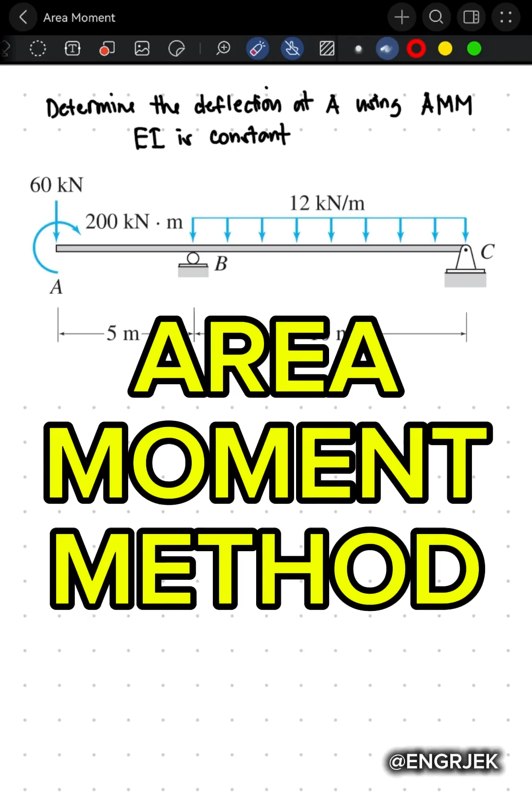So for this problem, we will determine the deflection at A using area moment method. So as you can see sa problem, this is similar sa problem natin last time. Magkaiba lang this time yung method na gagamitin natin in solving the deflection at A. Now, before we use the area moment method, dapat mapredict muna natin yung behavior ng beam natin. And we will use shear and moment diagrams.

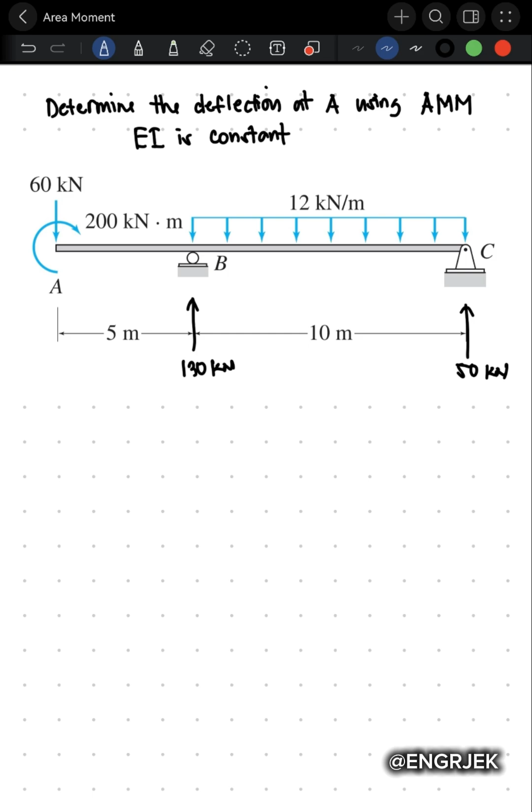So by using shear and moment diagrams class, as you can see, after determining the moment diagram, we can predict now the elastic curve of the beam. Kasi meron tayong rule class sa structural theory, if we have a positive moment, ang elastic curve at that point projected from the beam is concave upward. But if we have a negative moment just like this, we have a concave naman downward for the elastic curve.

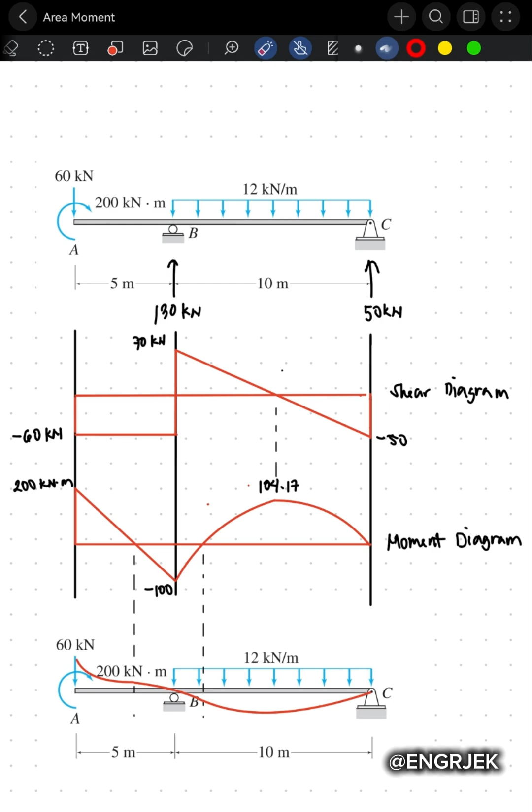For this diagram naman, which is positive moment, we have a concave upward. So overall, this is the elastic curve for the beam. As you can see, meron tayong concave upward and concave downward. Now, very important ito class, pag-determine natin ng mga tangent lines if we can draw the elastic curve. So balikan lang natin, nakakuha yan by determining first the moment diagram.

So after determining the elastic curve class, we can now draw the tangent lines. So as you can see, if I draw a tangent line at B, ito yun. And we can say that this is the tangent or deviation of C from tangent B. Kaya ang tawag natin is ganyan designation. So after determining class the elastic curve of the beam, if this is the new position of A, from B, ang tawag dyan natin, this distance is the deviation of A from tangent B. Kaya yan yung designation natin.

And yung deflection natin is from here, the new position, and from the initial position, and that is deflection at A. So ano ba mga meaning nito class na tangent of C or deviation of C from tangent B, and ano ba yung meaning ng deviation of A from tangent B?

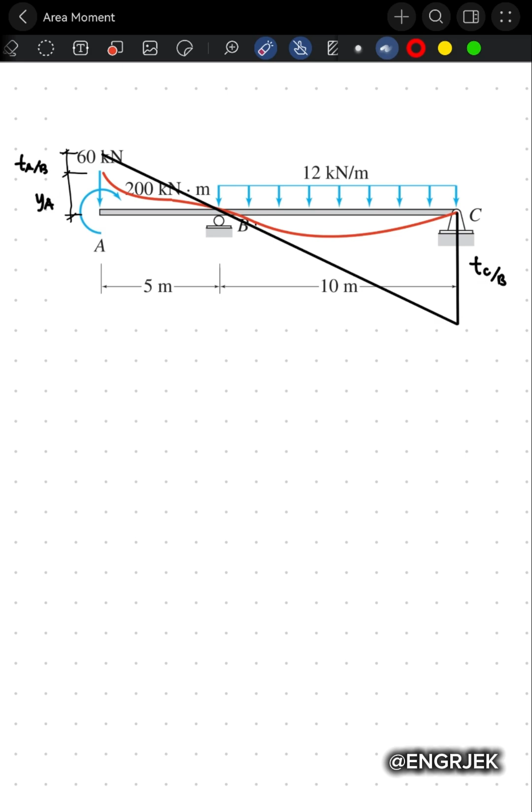So yung meaning class ng deviation of C from tangent B, that is the moment of the area under the M over EI diagram between points B and C about point C. So yung shortcut lang yan class is kung ano yung unang letter, dun tayo magmo-moment. Same case at the deviation of A from B, this is also the moment of the area under the M over EI diagram between points A and B about point A.

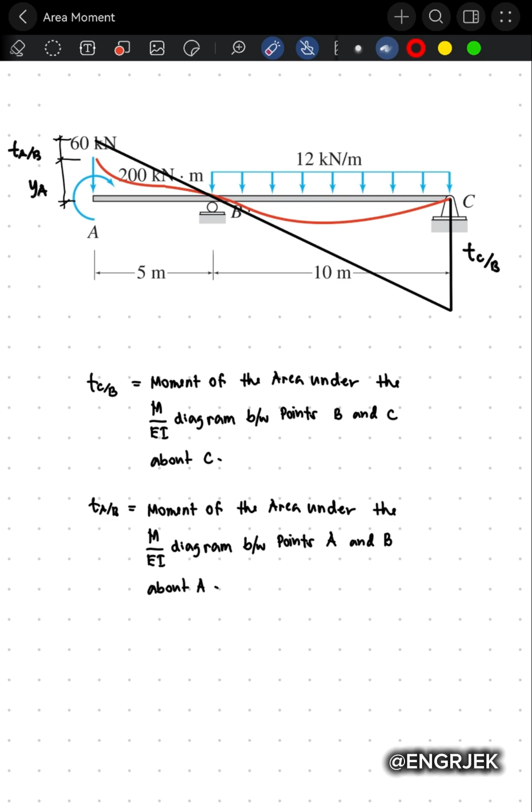So for this problem guys, this is the M over EI diagram using cantilever method. So paano ba yun nakuha? So I assume, let's say this is the fixed support at this beam. So lahat ng forces and loadings natin, moment tayo at that point. So if this is the fixed support, moment about that point, since we have 200 kilonewton meter, that is considered rectangular. So as you can see in drawing ko dito, that is 200 over EI, and that is the M over EI diagram for moment na 200 kilonewton meter.

Next, we have 60 kilonewton force which is going downward. If mag-moment tayo sa fixed support at C, we have a negative 60, the force, multiplied by moment arm which is 15, kasi yung distance niya from C is 15, we get negative 900 over EI. So for our concentrated load class, that is a triangular M over EI diagram. Next, we have a 130 kilonewton force, and mag-moment tayo about point C. And that is 130 multiplied by 10, positive. We have now a value here, 1,300 over EI. And that is also a rectangular M over EI diagram.

Next, we have a 12 kilonewton per meter. So yung moment diagram niya is ganito. We have a negative 12 multiplied by 10, that is the force, multiplied by moment arm, multiplied by 5. We have a negative 600 over EI. So this is your M over EI diagram using cantilever method.

Tatandaan dito class, if we have a concentrated load, we have a moment diagram na first degree. So kaya yung 60 kilonewton, we have a triangular, and for 130 kilonewton, we have a first degree then, which is magka-create ng moment M over EI, which is 1,300 over EI.

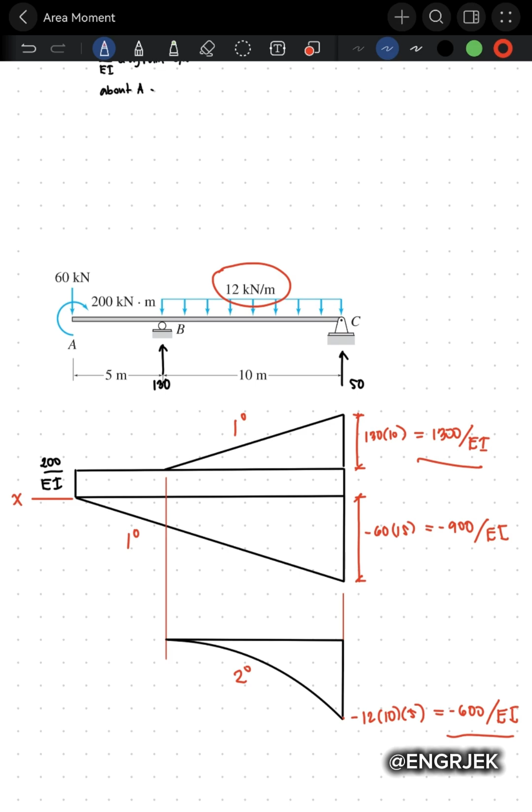But if we have a 12 kilonewton per meter line load, ang moment diagram niya should be second degree or parabolic. And that's why we have a negative 600 over EI, the value of the moment from point here. So ang tawag dito class is M over EI diagram by parts.

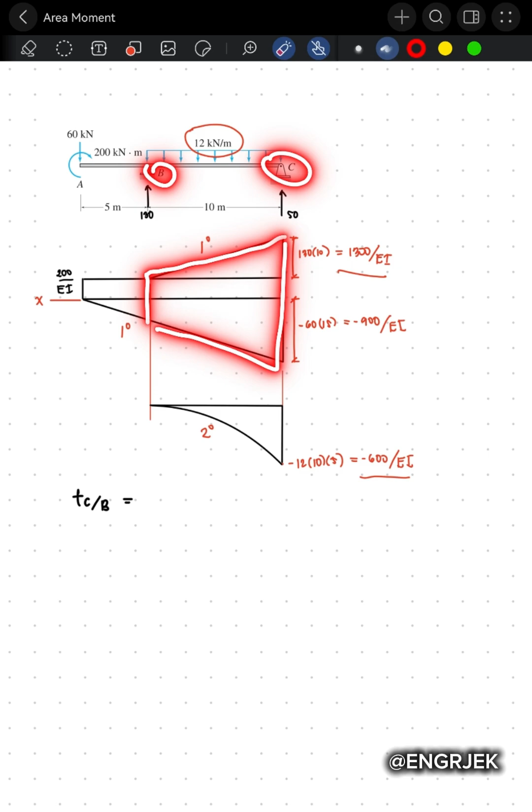So now we will solve the deviation of C about point B. And that is simply the moment of area under the diagram between B and C about point C. So ano ba yung areas doon? So as you can see sa diagrams, ito yung gagamitin natin na diagrams between point B and point C. And mag-moment tayo about point C. So first, I will use a triangle, yung above muna. Ito muna gagamitin ko.

So we have now 1/2 multiplied by 1,300 over EI. I-cancel ko muna yung EI class. Multiplied by, ang distance niya is 10 meters. Na yung moment arm niya about point C is 10 over 3 since we have a triangular. Plus, we have also 200 multiplied by 10 multiplied by 5 na moment arm about point C.

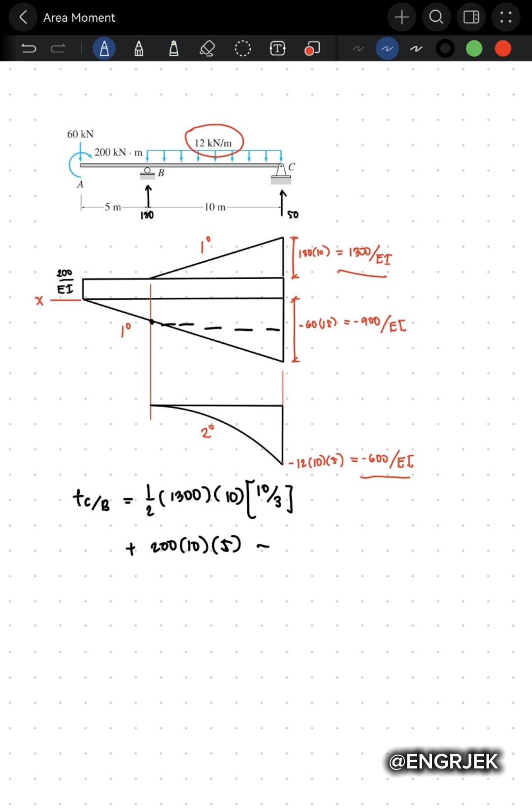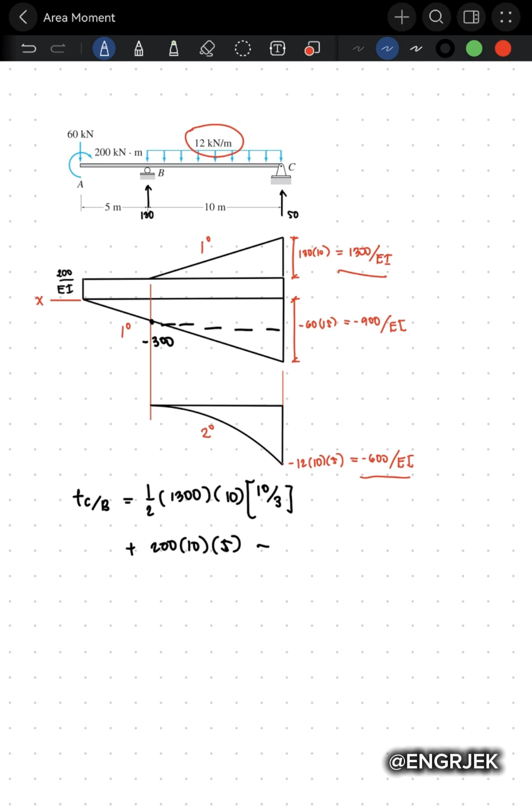Now, as you can see, we have a trapezoidal here. And by ratio and proportion class, we can calculate here the point that is negative 300, or that is also 60 multiplied by 5. So moving forward, minus tayo ng 300 multiplied by, that is also rectangle, multiplied by 10, and moment arm niya is 5. Then minus, we have 1/2, and that is 600 multiplied by 10. And yung moment arm niya from C is 1/3 of 10 meters.

Next, we have this spandrel. We have 1/3 of 600 multiplied by 10. And yung centroid niya from C, here, that is 1/4 of 10. That's why we have 10 over 4. So we calculate this, we have 5,000 over 3EI. So this is the deviation of C from tangent B.

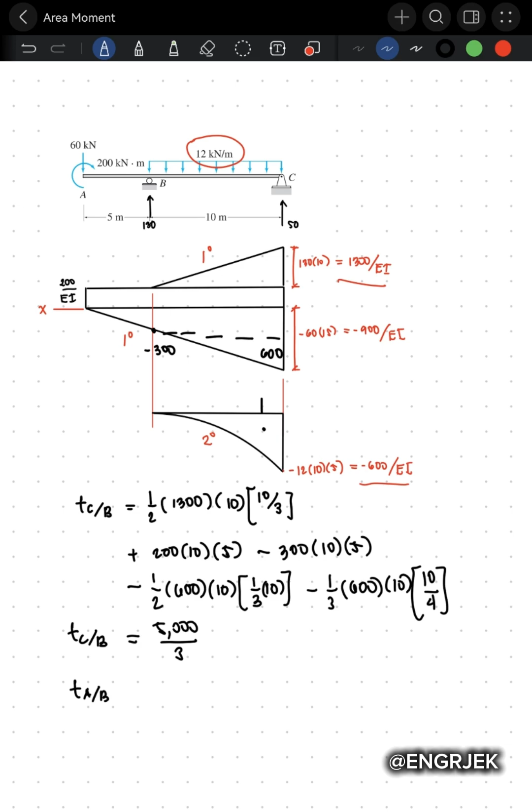So after that, we will calculate now the deviation of A from tangent B. Pag-solve ng deviation of A from B, ito naman ang gagamitin natin, this area. And magmo-moment naman tayo kung ano yung naunang letter, which is letter A, kaya doon tayo magmo-moment. So the deviation of A from tangent B, that is 200 multiplied by 5 meters. Yung moment arm niya from A, that is 2.5.

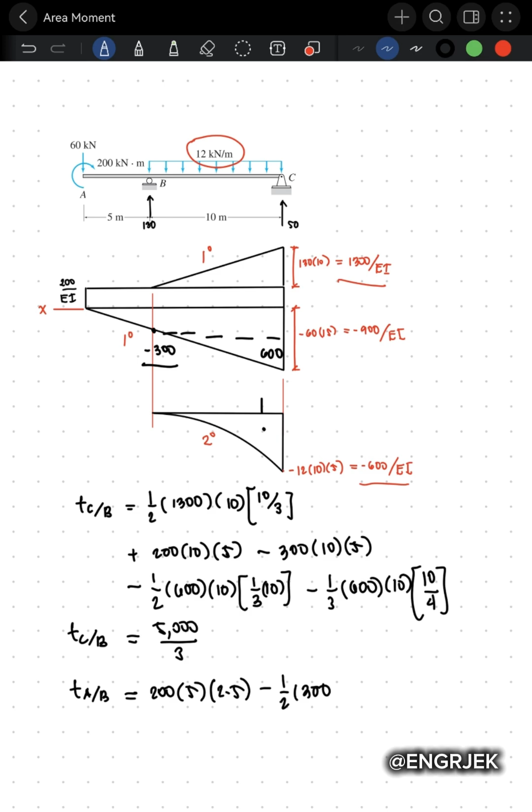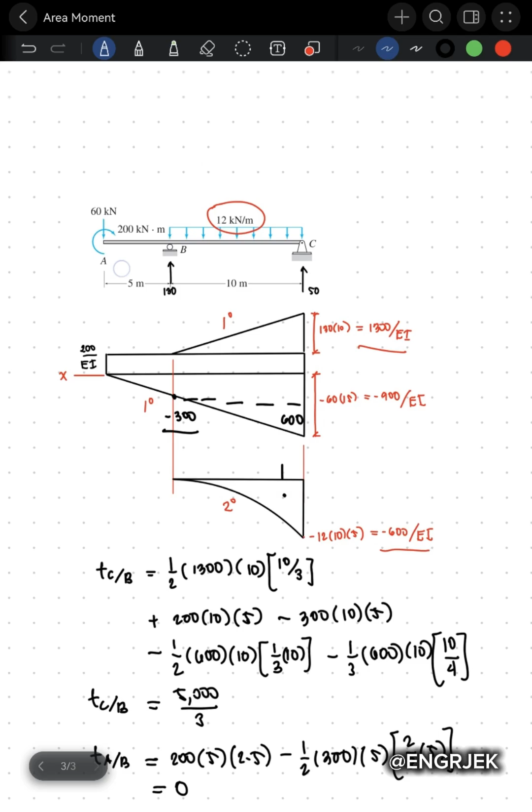And minus area, which is 1/2 multiplied by 300, this value, multiplied by distance 5. And yung moment arm niya about point A is 2/3 of 5 meters. So if you calculate this, we get 0. Meaning, yung deviation of A pala about tangent B is 0. So itong deflection here, nag-touch pala dito sa tangent line natin for B.

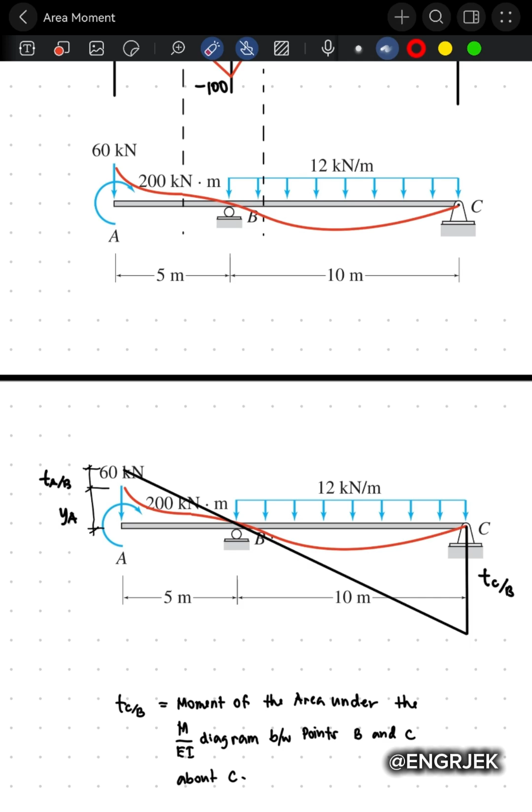So after determining the deviations, we will use ratio and proportion or similar triangles. If this is the slope at B, slope at B equals rise over run, which is the deviation of C from tangent B all over 10 meters. By vertical angles, this is also the slope at B. So since 0 yung deviation of A from B, itong distance na to will be considered as deflection at A. Meaning, yung new position of A tumama dito sa tangent of B natin.

So the slope at B is also the deflection at A all over 5 meters. So finally, the deflection at A is 5 multiplied by 5,000 over 3 all over 10 meters. Sagot natin, just like the last video, 2,500 over 3EI, and that is going upward. So this is now the answer for this problem, the same answer as the last video using a different approach. Last time we used double integration method, but this time we used area moment method.